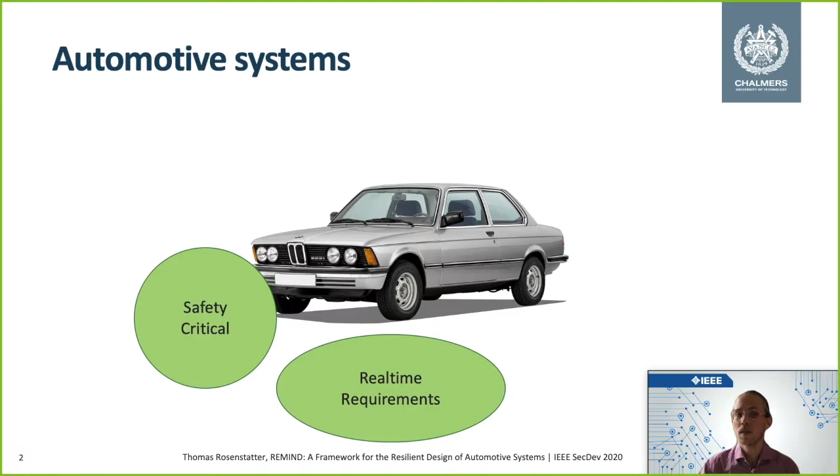Other factors and aspects are low energy consumption and the costs; introducing new hardware or more resource-requiring hardware would lead to an immediate cost increase of a car. And we also have the lifetime, because vehicles usually stay around us for 15 years, which is around 150,000 to 300,000 kilometers. And during this time, quite many things can happen.

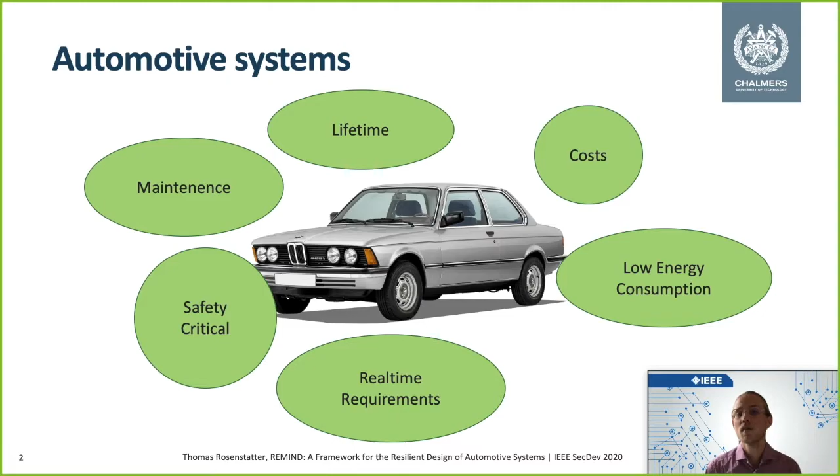It can change the owner, and we for sure also need maintenance. We need to replace parts, we need to update the firmware, and all of this is an aspect of automotive systems. This might look quite similar to other areas such as trains or airplanes. But what we believe makes the automotive domain so distinct is that it's actually operated by millions of people every day around the world. So we have cars everywhere around us and we need to make them resilient.

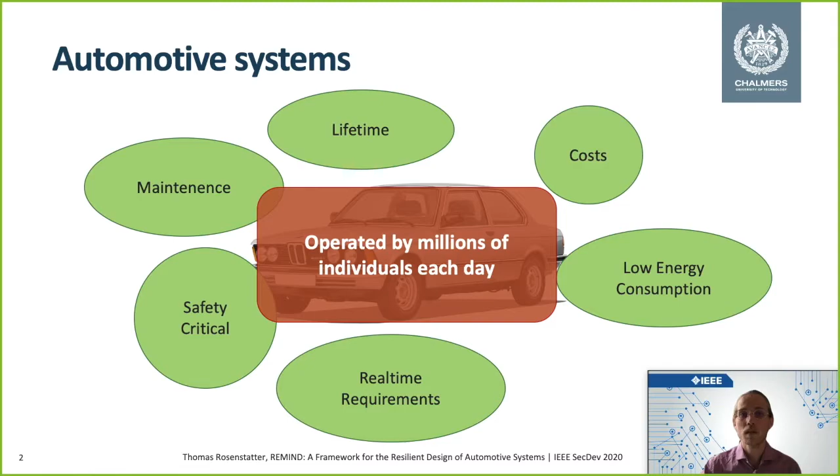This is an overview of the future architecture of vehicles. Now the move is towards a more centralized architecture, which consists of this core system. This core system is usually 2 or 4 high-performance computing units, and these units are communicating with sensors and actuators that are placed all over the vehicle. This trend is seen for all vehicle manufacturers; they are all going towards a more centralized architecture.

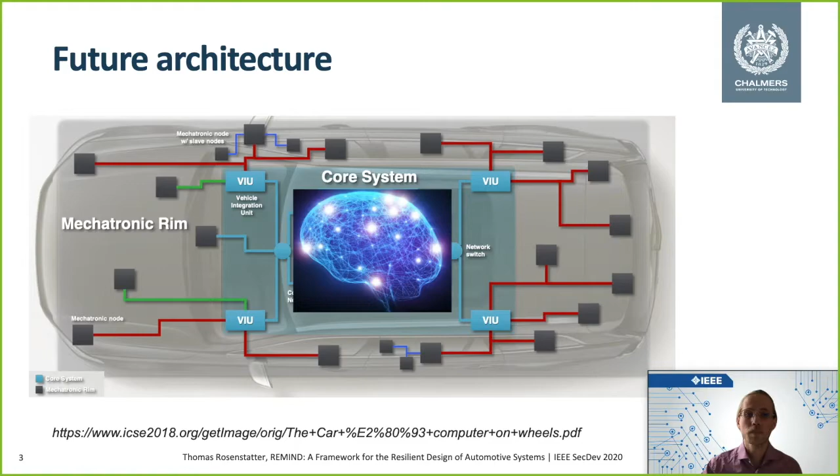And how do we define resilience? There's one definition from Laprie, which says that resilience is the persistence when facing changes. Our definition is the following: resilience is the property of a system with the ability to maintain its intended operation in a dependable and secure way, possibly with a degraded functionality, in the presence of faults and attacks. With this definition, we want to highlight that we are looking into faults and attacks that might occur during a vehicular lifetime.

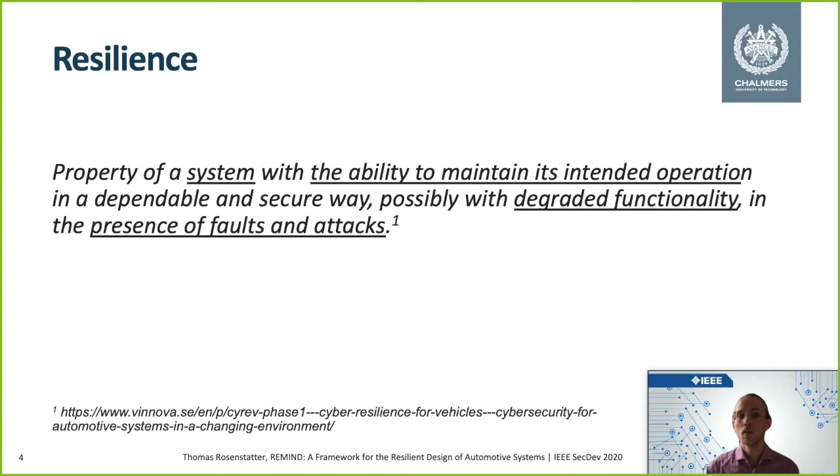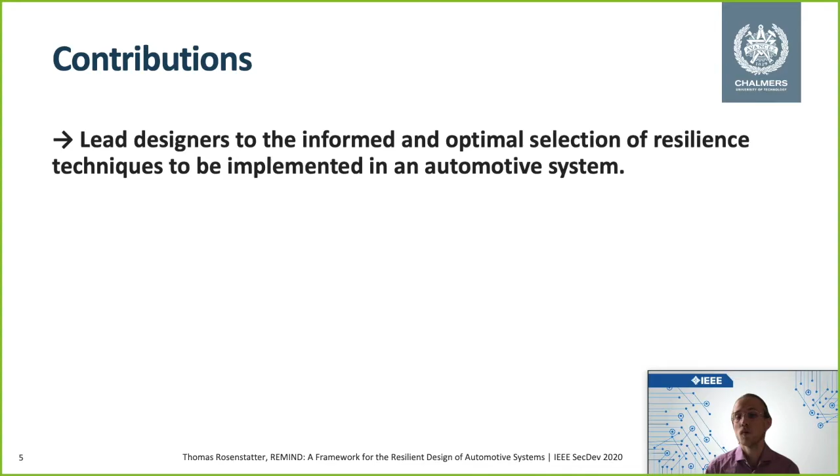The aim of this publication is to lead designers to the informed and optimal selection of resilience techniques for an automotive system. In order to do so, we have first systematically identified resilience techniques based on relevant publications and existing work. Then we have come up with a taxonomy that comprises 4 strategies: detection, mitigation, recovery, and endurance.

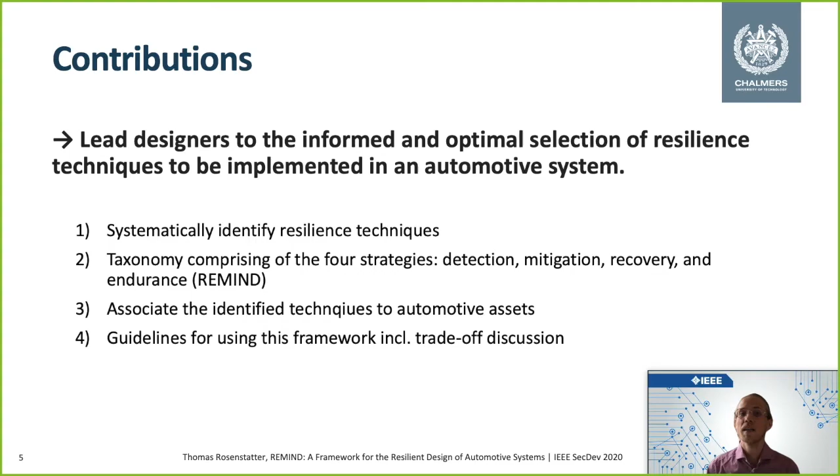Furthermore, we associate the identified resilience techniques to automotive assets such as hardware, software, network communication, and data storage. And last but not least, we have also provided guidelines that show how this framework can be used and discuss trade-offs for specific techniques and solutions given a specific threat.

So let's start with the overview of what we have done. We queried the Scopus database to find relevant publications that already look into a collection of resilience techniques. We focused on surveys and literature reviews, and we included terms such as resilience and survivability, but also dependability terms such as error recovery, fault tolerance, and so on. We limited our search to publications published after 2010, and they must have been written in English.

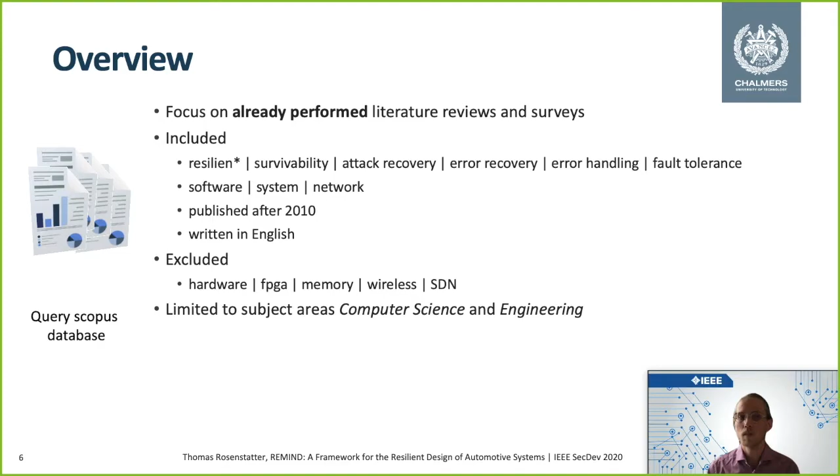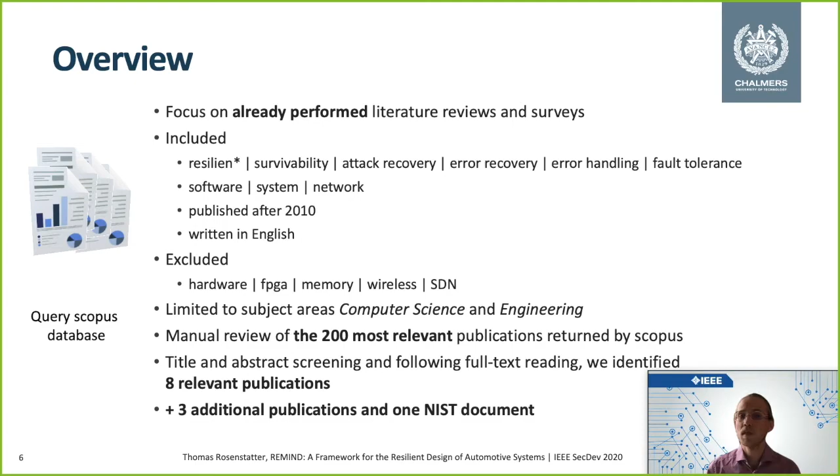We excluded hardware, FPGA, memory, and SDN, as well as wireless, because we want to look at resilience techniques on a system level. We didn't intend to look at specific resilience solutions for software-defined networks, for instance. We then looked at the top 200 most relevant publications returned by Scopus and manually screened them for relevancy. The outcome was 8 relevant publications, plus 3 additional publications and 1 NIST document that we had already found before.

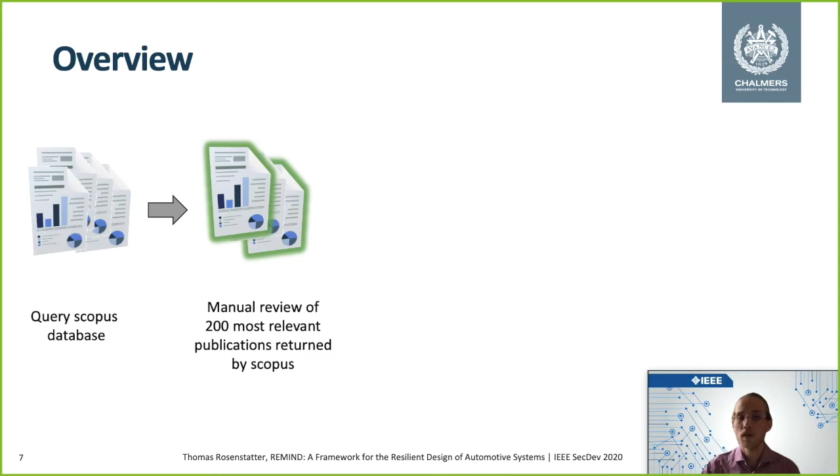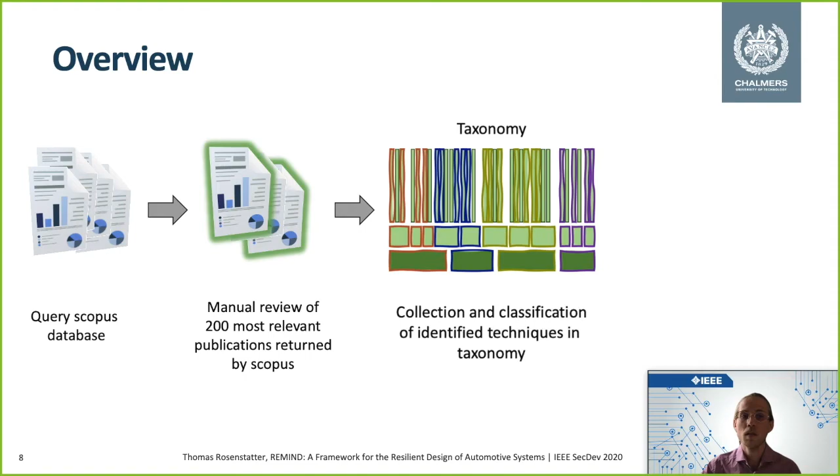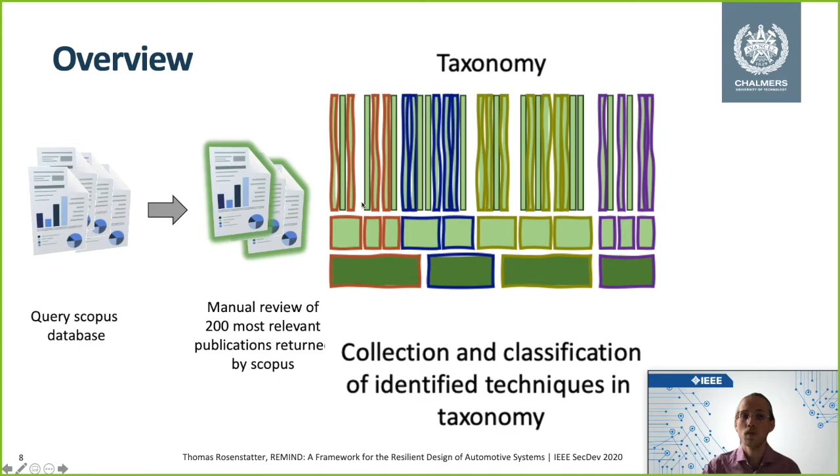And after having screened these publications and identified the relevant publications, we have worked on a taxonomy that is in this layered approach, where we have strategies on the bottom, patterns in the middle, and the specific solutions on top. And with this taxonomy, we also can help designers to immediately choose for each strategy which techniques they want to use. And we additionally also provide these guidelines that are based on specific threats.

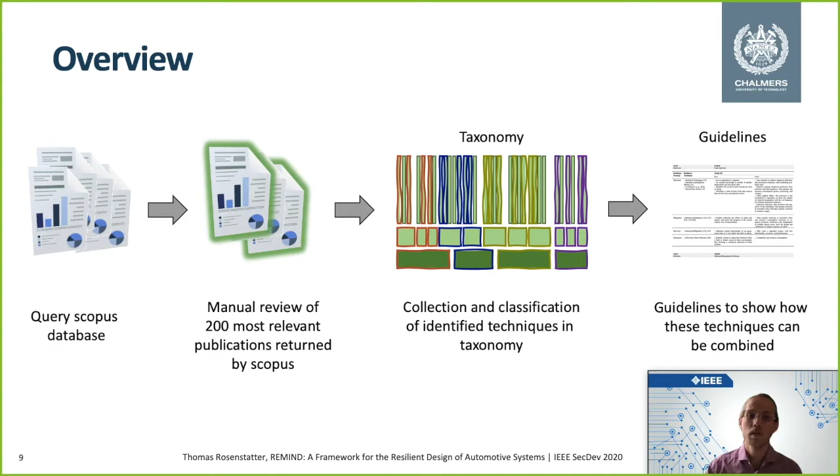And here we identified certain techniques that can mitigate this security threat, and we discuss the trade-offs when using these, such as energy consumption and so on. And here you can see the domains and disciplines of the identified publications. So we can see that fault tolerance and resilience is quite prominent, but we also found some security publications, as well as one publication that is a survey paper on dependability. So it also covers fault tolerance, but not only, it covers fault prevention and so on as well.

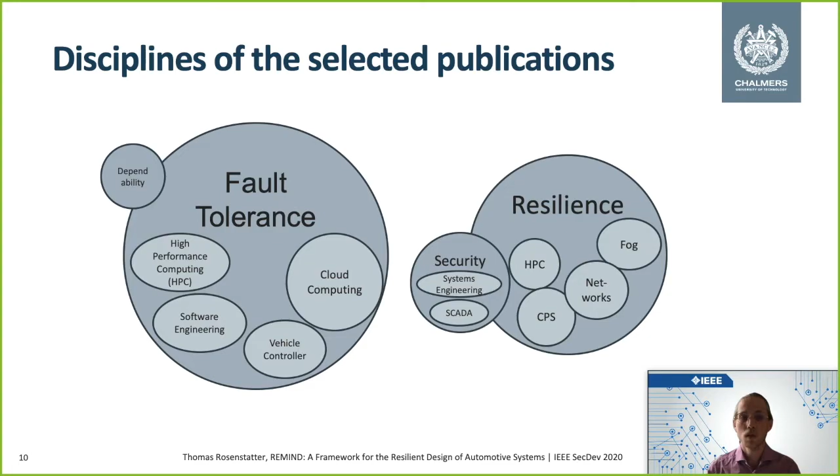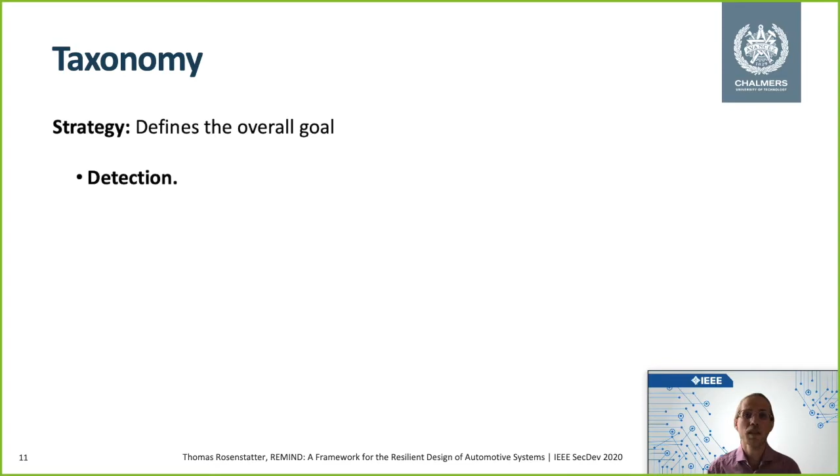So if we look at the taxonomy again, we can already say that we have the strategies on the bottom, which define the overall goal. And then we have the strategy of detection. We need to have strategies or techniques that are detecting faults and attacks. We have mitigation techniques, techniques that are keeping the system operational, and recovery techniques that are bringing back the system to an operational state. And the fourth strategy is endurance, which has the focus on lasting resilience. So it's not about taking immediate actions, it's more looking in the long term of providing a resilient architecture.

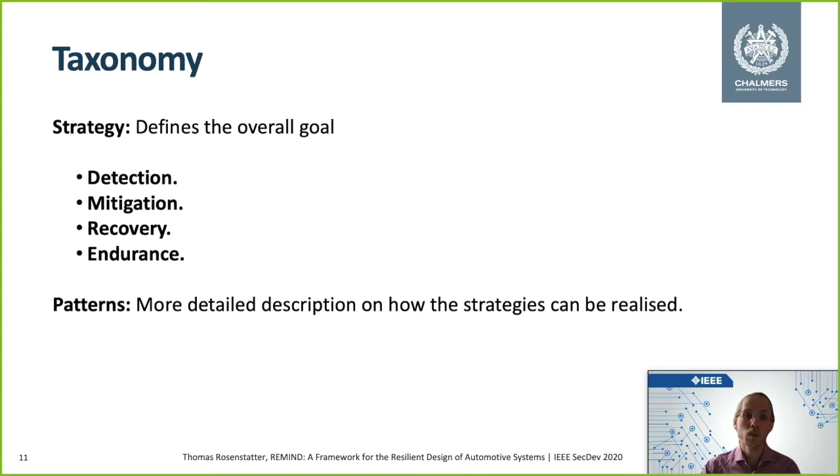And in the mid layer, we have patterns. So these are more specific, more detailed descriptions of how a strategy can be implemented or realized. And then we also have these techniques and solutions that are actually already specific methods on how to realize a specific solution for the automotive domain.

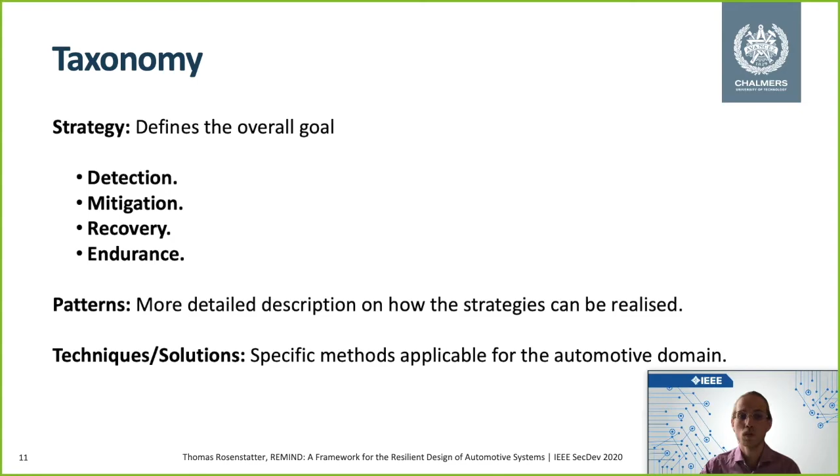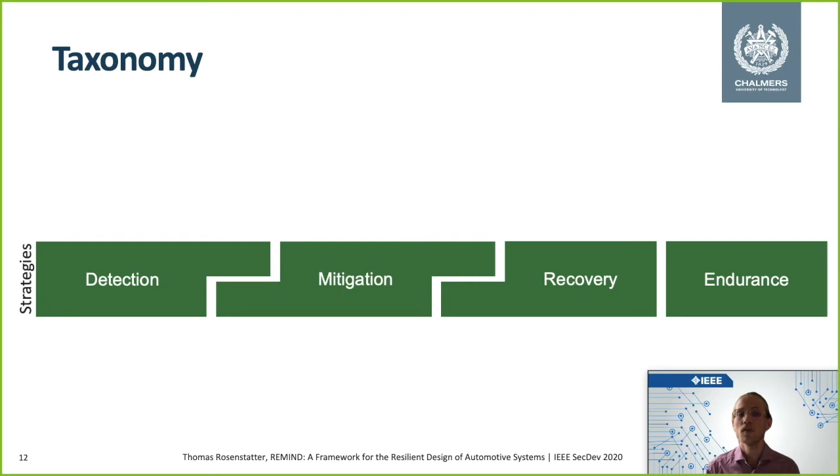And here we can see the strategies. So we can see detection, mitigation, recovery, and endurance. And what we can also see is that mitigation is intertwined with detection and recovery. So here we have, for instance, redundancy as well as reconfiguration, which are providing both. Redundancy provides detection as well as mitigation, and reconfiguration can be used for mitigation as well as recovery.

So now I'll give a brief overview of the patterns that we have identified. So we have identified specification-based techniques, like signature-based detection or runtime verification, but we've also found anomaly-based detection, prediction of faults and attacks, as well as redundancy. And redundancy also contains diversity techniques, because a pure redundant system suffers from the same design flaws, so we need to have mechanisms that introduce some diversity into the system. For instance, N-version design, recovery blocks, N-variant systems, and so on.

And for specific mitigation techniques, we've identified adaptive response, runtime enforcement, as well as reconfiguration and reparameterization. Pure recovery-based techniques are migration, checkpointing and rollback, and also roll-forward actions. And for endurance, we've identified as a big part all these self-strategies, like self-adaptation, self-awareness, and self-organization. But we've also seen techniques or patterns for verification and validation, for robustness, as well as forensics, in order to have the evidence that we need in case a fault or an attack has happened.

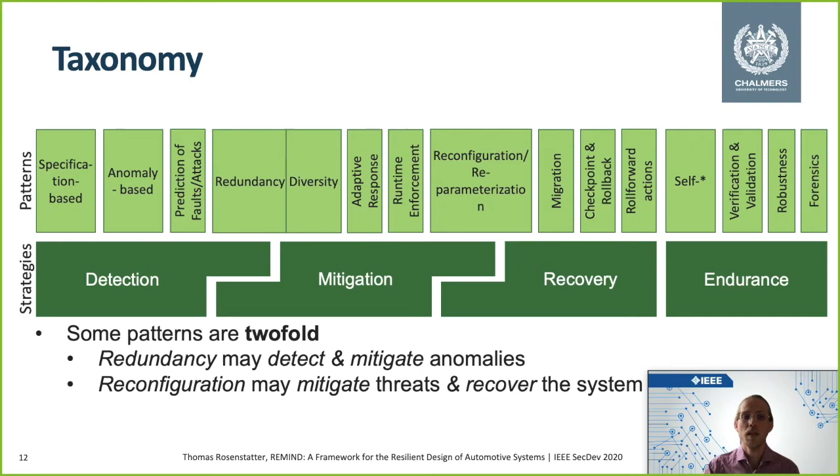So if we look back into these techniques and where these techniques come from. In this illustration, we can see some of the selected patterns, and here we can see the disciplines that the papers originate from. And we can see that quite many of these techniques are already from resilience, from other domains, but we can also see that the identified techniques are also in the area of fault tolerance as well as security.

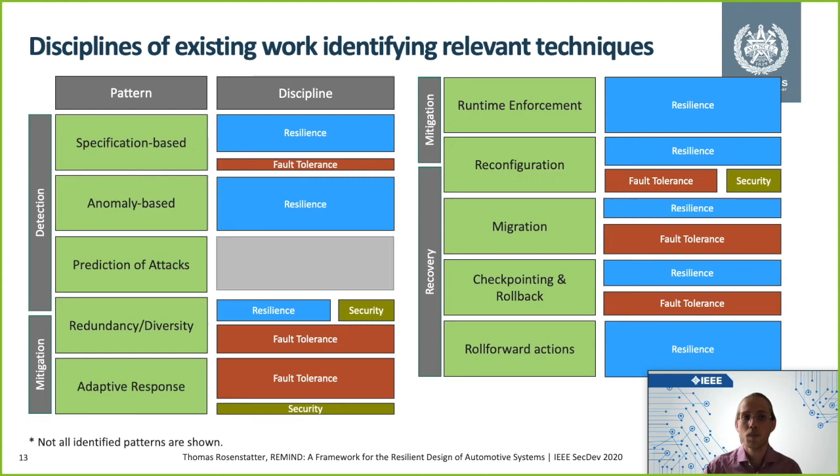For the other way around, from which domains do these techniques come? So we can see here that it's more equally distributed. We have cyber-physical systems, high-performance computing, as well as cloud computing, but also other domains such as vehicle controller design, software engineering, and so on. So what we can see here as well is that we've identified quite many cloud computing and high-performance computing techniques for the automotive domain. And this is due to the fact that we already consider this future architecture where we have hypervisor-based virtualization on these centralized nodes in the vehicle.

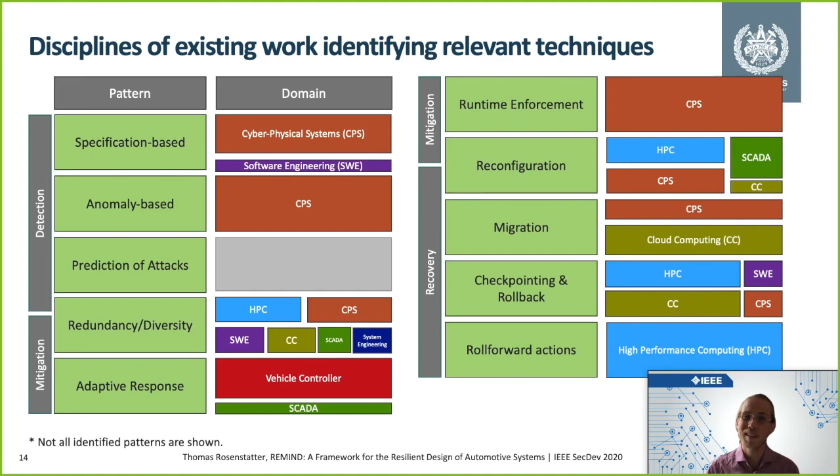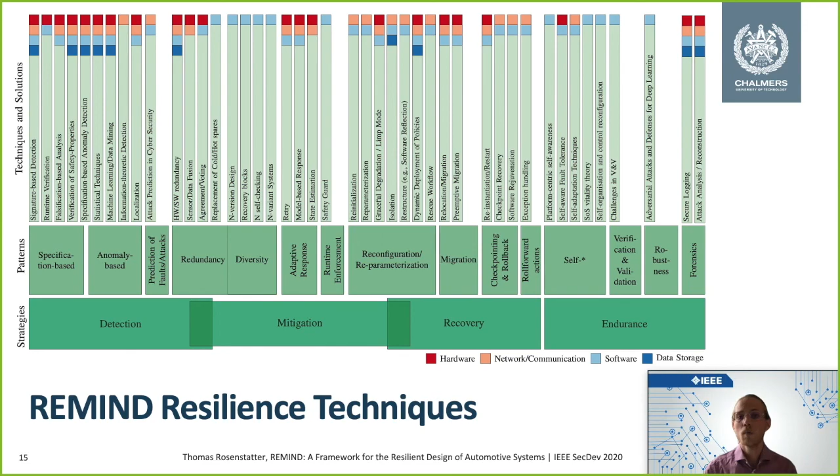And here we can see overall our techniques, the resilience techniques, and how it looks in the publication. And additionally in the publication, we also point to the specific techniques that have already been designed or developed for the automotive domain. So if you want to go into more detail on this, please have a look at our paper.